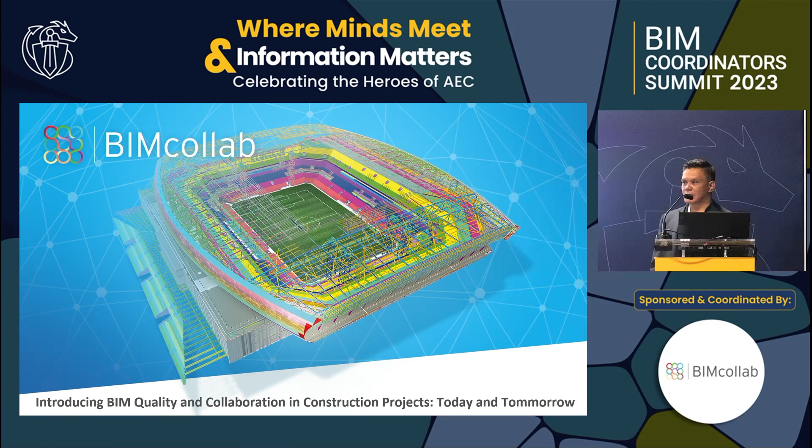So let's get started. First, I want to take you on the journey with BIM Collab. BIM Collab is a platform that can drive BIM coordination, especially in larger teams or complex challenges. I want to take you on the journey of what issue management with BIM Collab is, and also what it brings for you tomorrow.

My name is Christian Dalhuizen. I'm a consultant at BIM Collab. I've been working with digital tools for over 25 years. In my role, I supported many customers worldwide with setting up projects and getting the most out of the digital tools that we provide.

We are a global company, active across the globe, working on many different projects in different sectors, from buildings to civil engineering, transportation, energy sector. Every project that has complex challenges and where multiple people need to align, BIM Collab is very useful. Our platform consists of multiple tools that integrate, making your teams build as one.

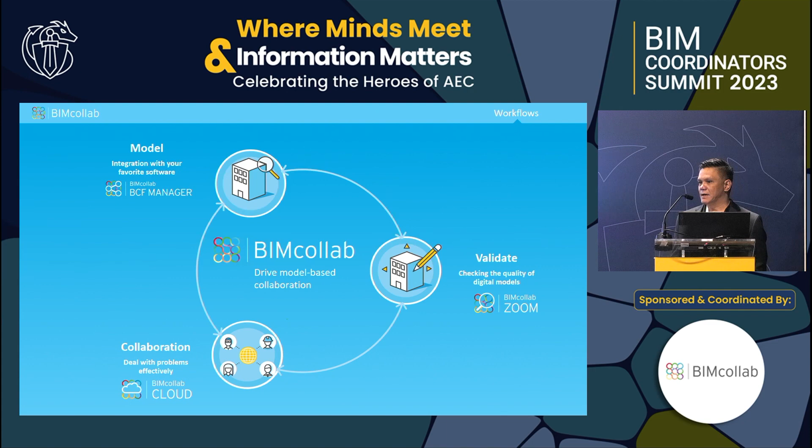We have connections with all the BIM applications to directly integrate to our platform. We have tools to check models to make sure that they are aligned and clash-free. We can also check for data properties if there are exchange information requirements that need to be adhered to. And we bring that together on our collaborative cloud, where all issues and requirements can be shared with people on the team.

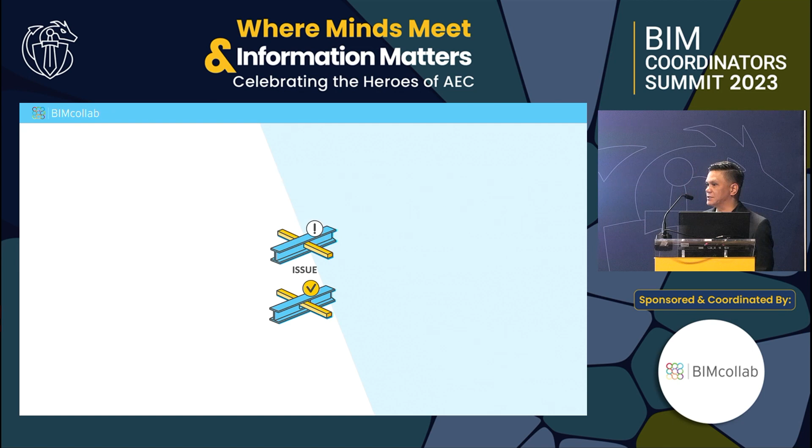Normally in projects, some things are taken for granted, like the time it takes to raise issues and communicate them. When people find issues, this is an example, it could be different for your situation, but it usually takes around 5 minutes to identify and document with screenshots or pictures or 2D drawings that you then need to send through reporting, explaining, and eventually checking and following up. If you look at the time it takes about 20 minutes, but if you look at the workflow within BIM Collab, since it's cloud-based, you are doing all of these tasks at once.

So it would only take 5 minutes in comparison. If you look at the time saved, this could lead up to 15 minutes per issue that you need to communicate. Depending on the people working on the project and how many issues you have, you can calculate the time saved. Let's say per month you raise 15 issues, that would lead to 225 minutes saved. And it all adds up. If you have more people on a project, the entire team would save up to 93, 94 hours every month. So that's substantial, and it's also embedding everything into one very coherent workflow.

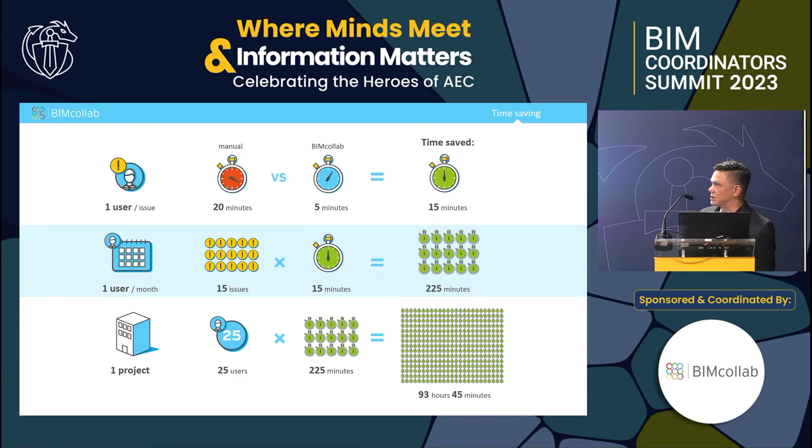So everyone works the same. You can even, because everything is digital, query the database, have it on visual dashboards, inform your management about the progress, etc. These are tasks that are embedded and they don't need to be created separately. So I will skip through this a little bit because I know we're on the clock and I don't want to be late for our next speaker.

BCF Manager is a tool that is free on our platform, and there are a lot of different tools. Almost all common tools found in the industry are supported with our plugins to BIM Collab. You can directly integrate your software without leaving it or changing your workflows. We also have embedded validation tools that can check the quality of models. It's fully integrated into our platform, and it also takes care of the revision checks afterwards to make sure that the issues you raised are also rechecked to see if they are actually solved or not.

I also want to share a technology preview in this session. At BIM Collab, we are always further developing our platform, and we identified that we want to bring more stakeholders in, but we also want to take care of the data on projects that is becoming more and more important, or even a specific requirement. For this, we adopted the Building Smart IDS standard, and I want to explain that a little bit further for those who don't know that standard.

Building Smart saw the challenge that people need to exchange information requirements, but they all do that in a different style. They could be Excel spreadsheets, but the format could be different. There's a lot of different requirements that need to be met on projects, but you need to translate that yourself to perhaps rules, to check that, and to make sure that the modeling teams are aware of these requirements, but they're all in different styles and formats.

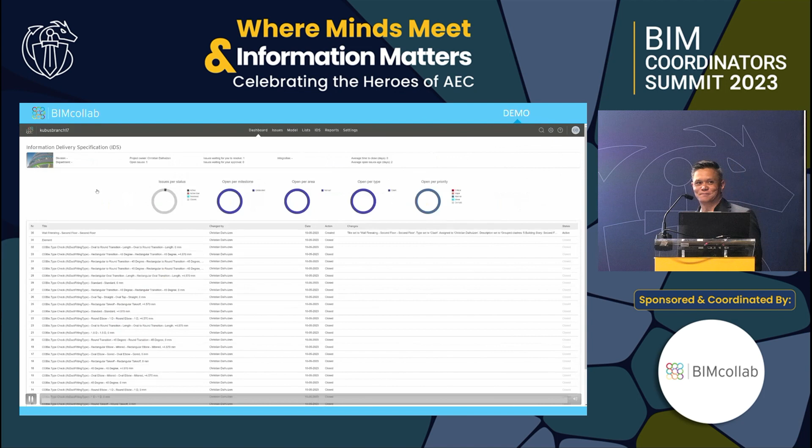But anyway, through our platform, attached to our projects are the requirements, and by logging into maybe the Revit BCF manager, a modeler can review the necessary data, and then our modeling tool, our checking tool, BIMcollab Zoom, can then check if that requirement is met or not. And if it's not, they can create issues on our platform, attach it to the correct stakeholder to fix it in their application.

So in this case, you can tell which components should have a specific property and what the value of that property or the name of the property should be, if it's defined or not, or even have the values that are allowed set in these requirements. Like in this case, a fire rating property with allowed values of 1 and 2 hours.

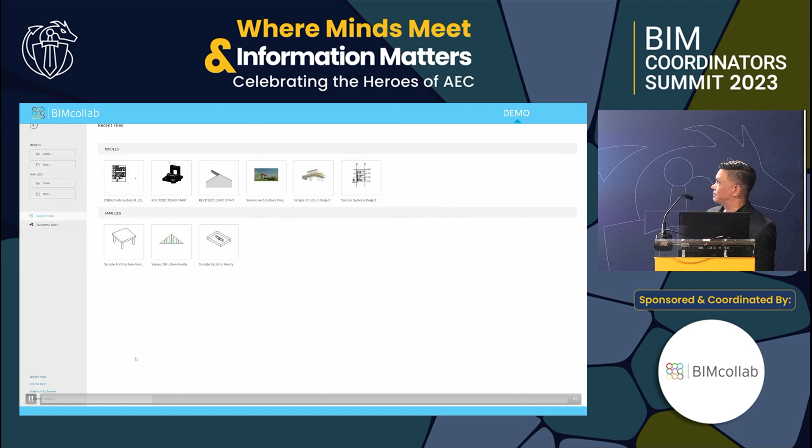So in a modeling application, you can load up your models, connect to the platform with the free plugin. Of course, this is used to also receive issues that were assigned to you maybe for clash detection. So you can also use that to jump to the correct locations and fix them. But in the future, this will also bring the requirements from the IDS standard.

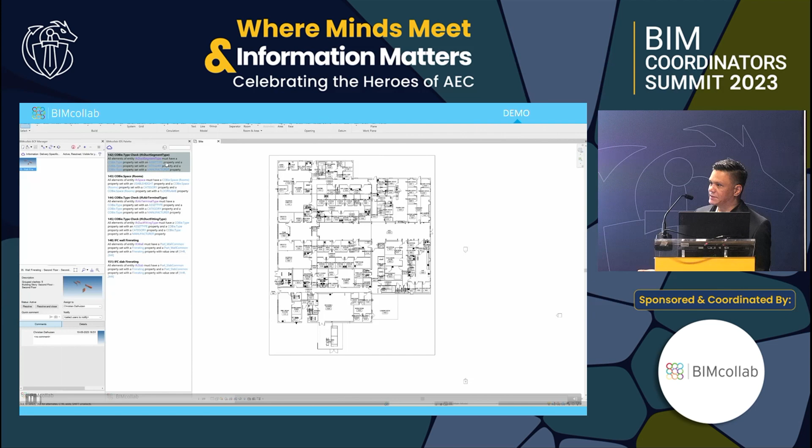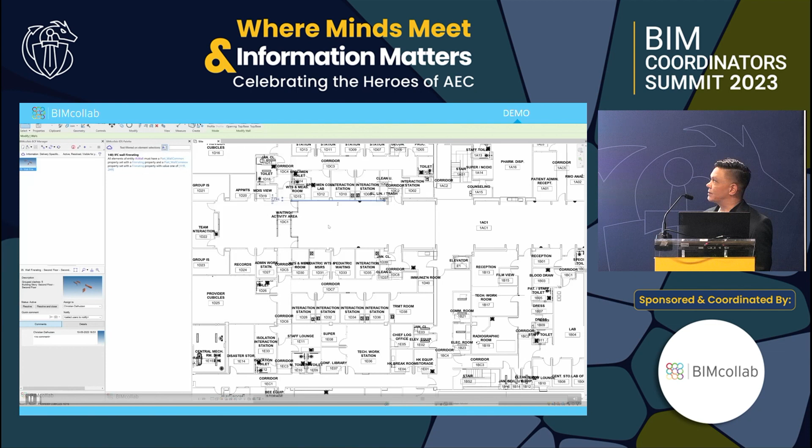So connecting to the specific project, in this case a demonstration project, we'll bring up the palette. You can see all the requirements, and because we identified that there could be a lot of those requirements on projects, we also made a smart filtering system that you can select a component and then filter for that component type, and then all the requirements for that component class are listed. So you can change your model accordingly, or even reduce the chance of creating issues by doing it first time right.

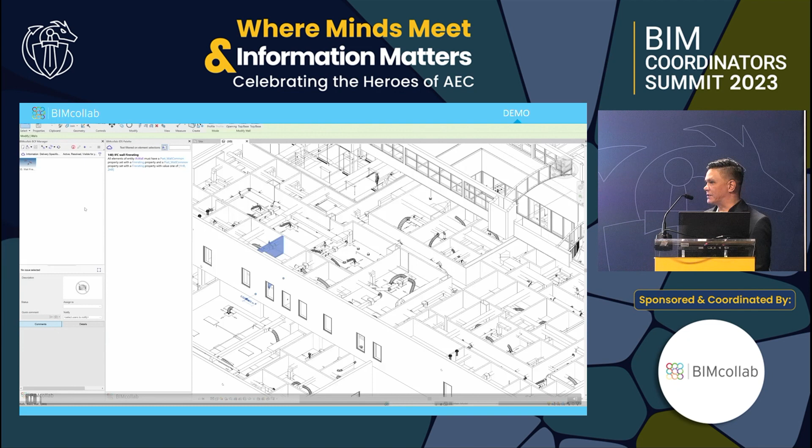So we feel that this would be very helpful, bringing a structured workflow around the data requirements, which will further help our industry to be more effective, and that the information in BIM models becomes more trustworthy and also more usable moving forward.

So this section is about checking it. So we have our model validation tool, BIMcollab Zoom, which can be acquired next to our BIMcollab Cloud. It's used to federate and view BIM files and point cloud files. But it also has checking features for clash detection, and in the future also the information checking.

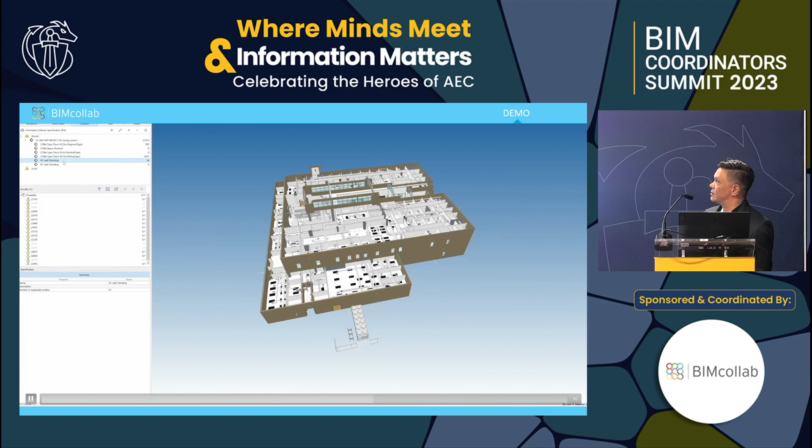So connecting will give me the requirements that I recently just shared with the modeling team. So they are exactly one-on-one. You can run a check, find components which do not adhere to the requirements, and create automated issues from them and assign them to the correct modeling teams.

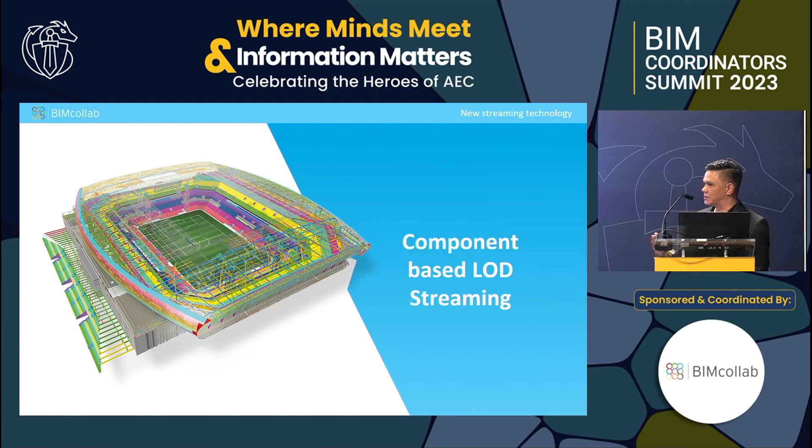So this is very effective to stream models through a cloud without having to rely on hiding objects while navigating, long loading times, etc. So you can share models with just one click, the size of this, and even bigger, without any lag or delay or loss of frame rate because of this LOD streaming.

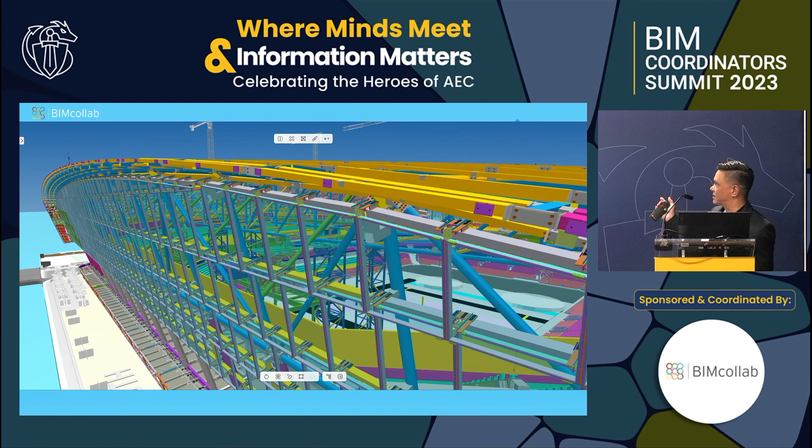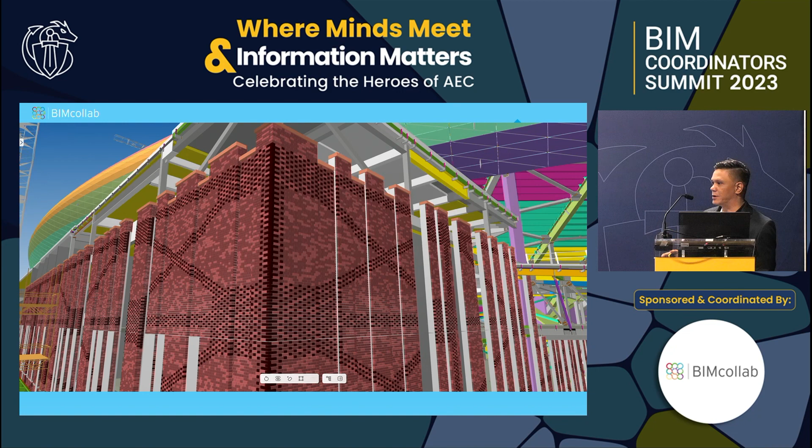Even models that are very highly complex, like this one, it contains multiple components which already take millions of polygons all at once. So 40 gigabytes of files just streaming through your browser to any desk, office, or on-site. All the bricks that you see here are individual bricks, and while navigating we don't have to hide any of these components, so novice users don't get lost while navigating.

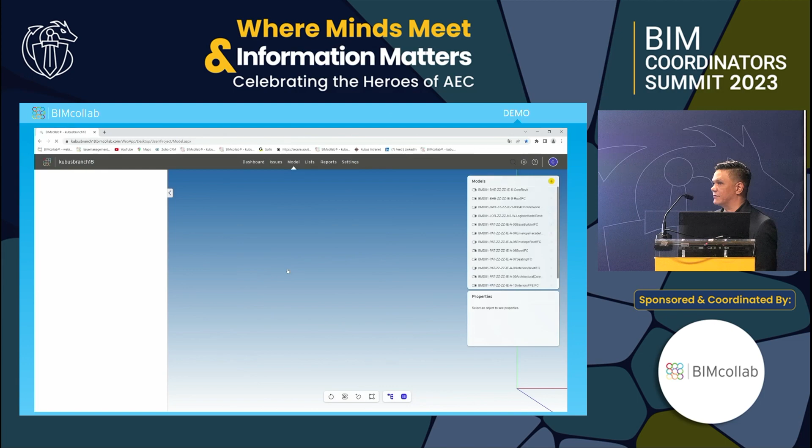So I have a small clip I want to show you. And of course on our stand I can give a more in-depth view of this.

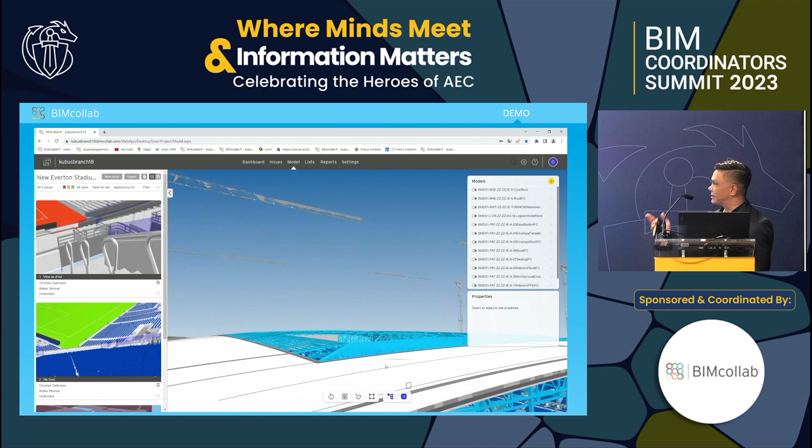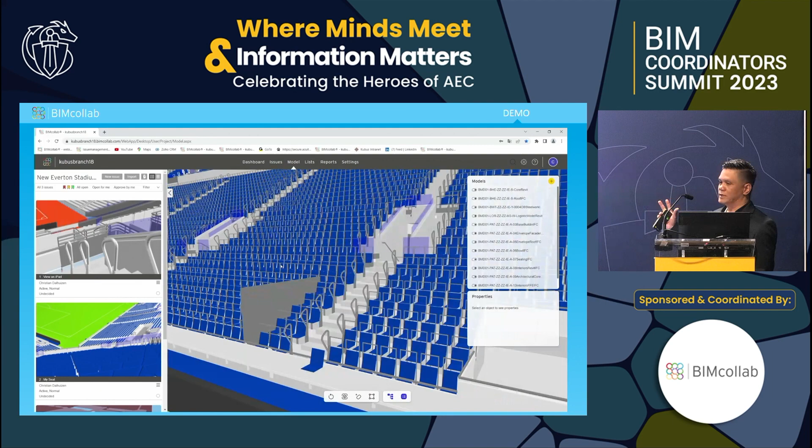As you can see, I can use a macro view from the entire site. I can just zoom in. It's very intuitive. And as you can see, all 60 to 65,000 seats are instantly available once you're in the vicinity of them. Outside of the screen, they could be boxes or points, but the user is not going to notice that. So it's super fast.

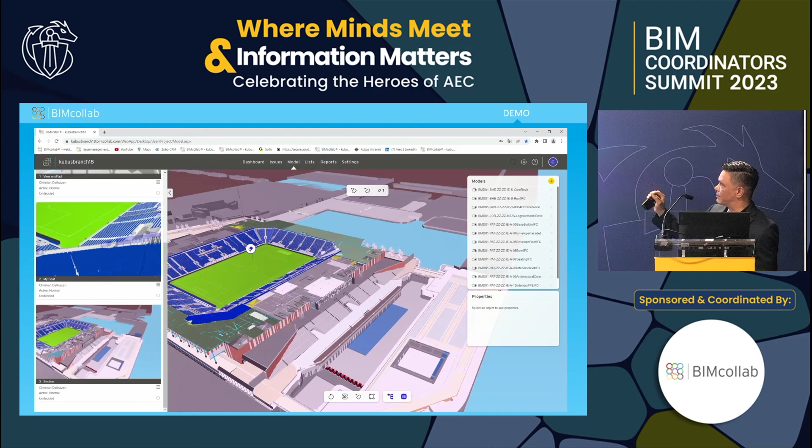And it also allows you to jump from issue, location, and stored images on the fly, create section planes, hide components. So the entire interior and technical services are also inside of these models.

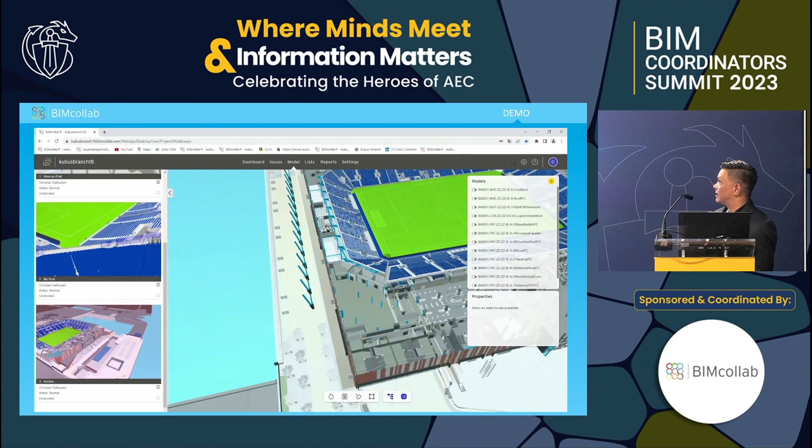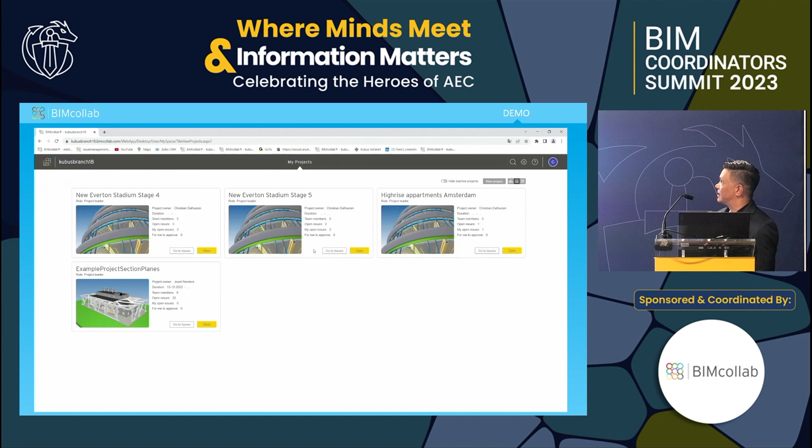And I will shortly jump to the steel construction model, which is challenging probably on any system, even desktop applications currently. And we are able to deliver that to anyone on any device using our cloud streaming technology.

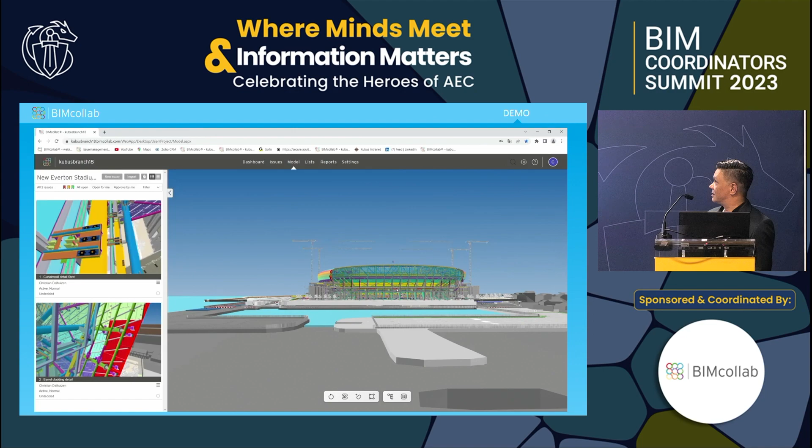So the detail that you see on the left side of the screen, it's fully modeled as built. And there are not one, but hundreds of those brackets available in this model. And as you can see, while navigating, we don't have to hide any components so that users can get lost. So nuts and bolts, rebar, it's all inside this model. You don't even see that in this image.

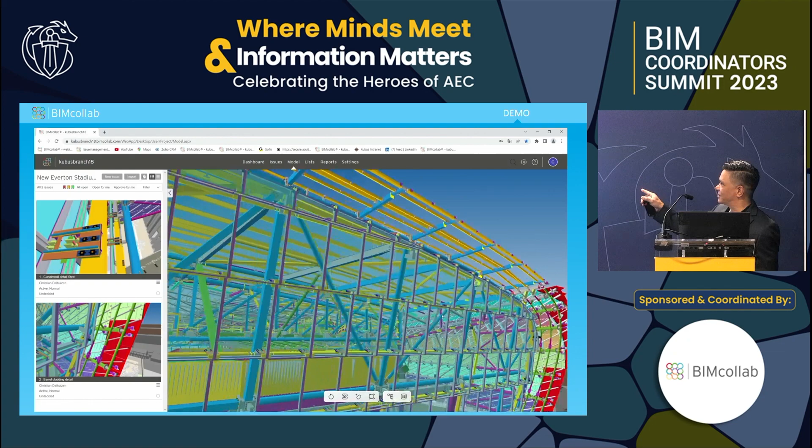But yeah, it of course creates a lot of more opportunities based on this technology, and to also reach a wider audience to take that BIM data that is becoming so vital to the next step and phase.

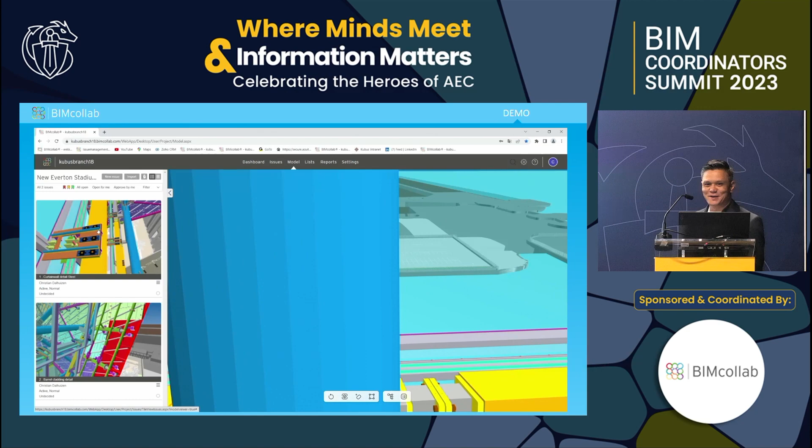Well, for once, I'm quite good with time. So it's always hard to time this. So I will let this run a little bit longer. But as you can see, the amount of detail that is in this 3D view...

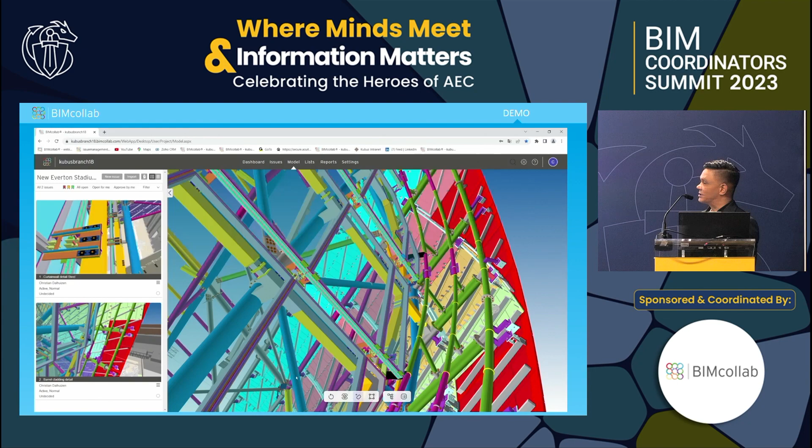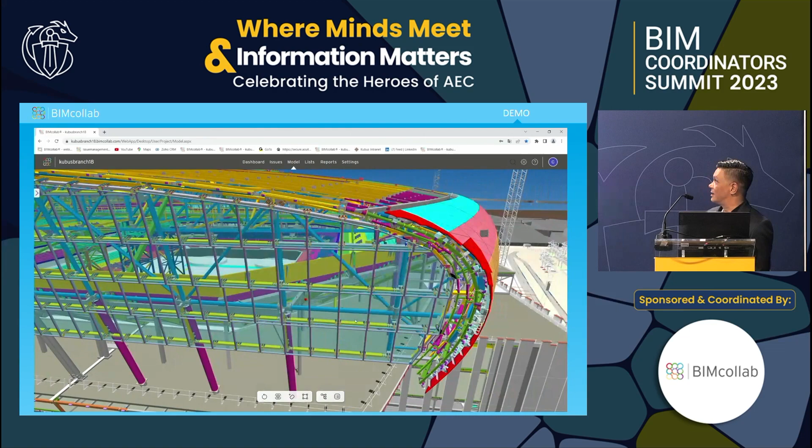is amazing. And yeah, myself, I've been working with this technology now and testing it for a while. You almost forget that you're not on a desktop application, on a mega machine. You can just run this even from an iPad and have the same interaction.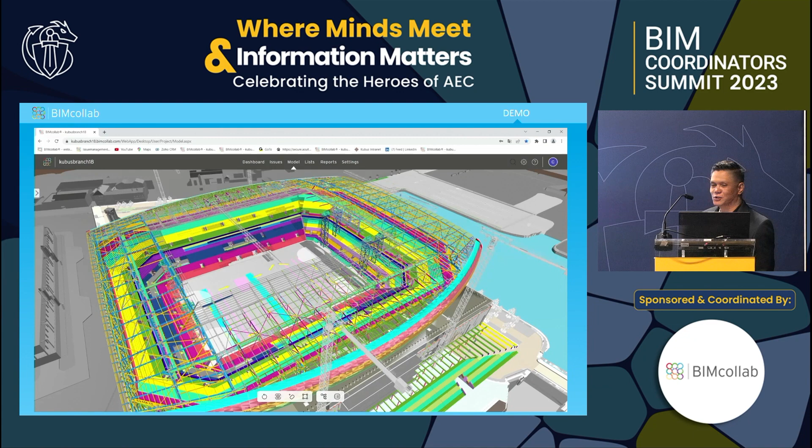And not yet? Okay, sorry. I need to keep talking. So...

Do you have a question? Just want to understand, typically, for the size of a project like an airport, how much data are we talking about? Well, this stadium, we have it in two stages, stage 4 and stage 5. Stage 4, I think the technical services alone were about 32 gigabytes, and the steel and rebar model was around 40. We've been rolling this out to our key customers, and we asked them to give us their most problematic large models. Currently we haven't found any substantial limit. So if you have a big airport, there's maybe potentially a need to split up some sections, but far less than you are currently used to.

Another important part is there are two types of users: one who works on BIMcollab, and another who just wants to view that, like the owners or project manager. They are not going to actually work on it; they are just taking it as an input.